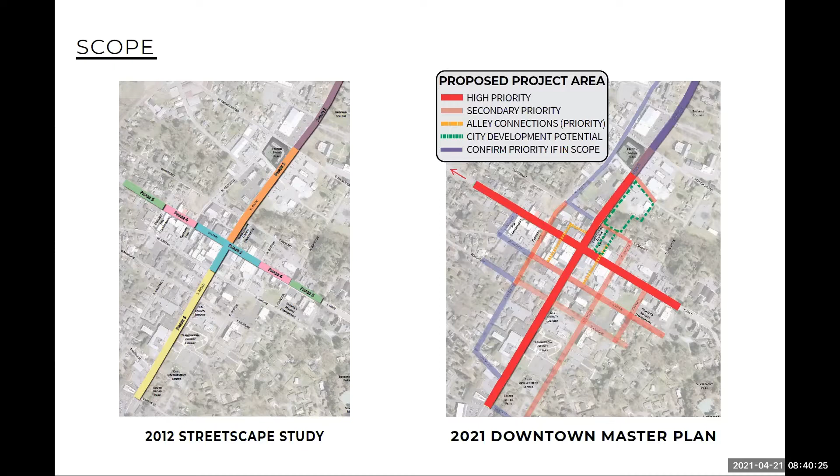To give you an overview of the schedule, we started this back at the beginning of this year with our existing conditions review and analysis of downtown. We had a conceptual master plan that we met with and reviewed with the Downtown Master Plan Committee back in March. We also reviewed a lot of that with NCDOT to make sure we were recommending things consistent with their guidelines, since we have a lot of restrictions on Broad Street and Main Street because of the state highways.

Now we just presented the preliminary master plan, which you're going to see here today, to the Downtown Master Plan Committee last week. We have 4 stakeholder meetings total planned this week, as well as one with the city and county in early May.

Next month, we're going to take the information we've gathered here today and through all of our stakeholder meetings and develop that into a final master plan in May and June.

I'm sure many of you probably think this is a very aggressive schedule, and it is. Part of the reason we're trying to do this in such a tight time frame is that we're trying to be prepared for another grant opportunity.

The city submitted for a BUILD grant in the past few years. That program has now changed under the new administration and is called RAISE. The notification for funding was just issued, I believe, last week and will be due in July.

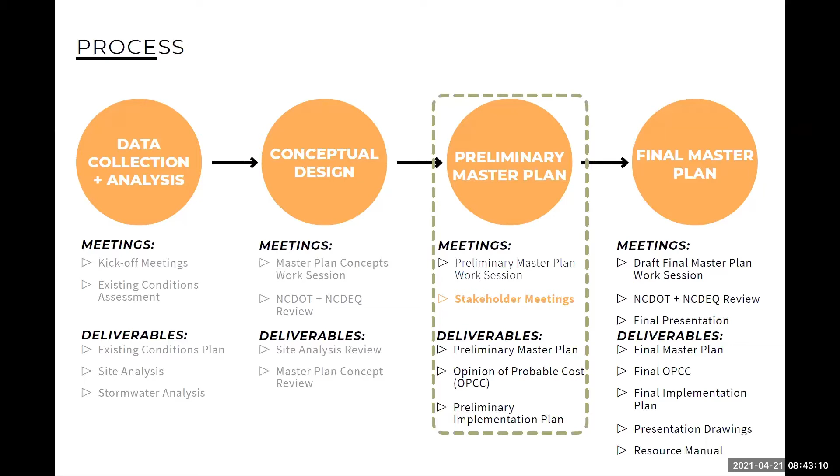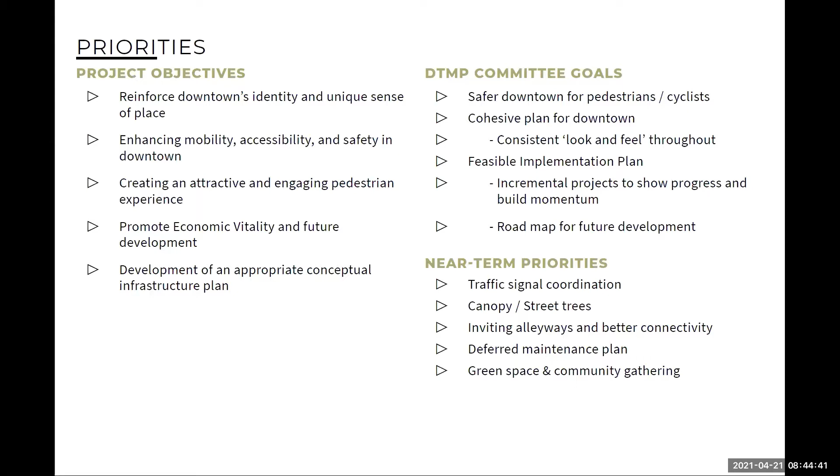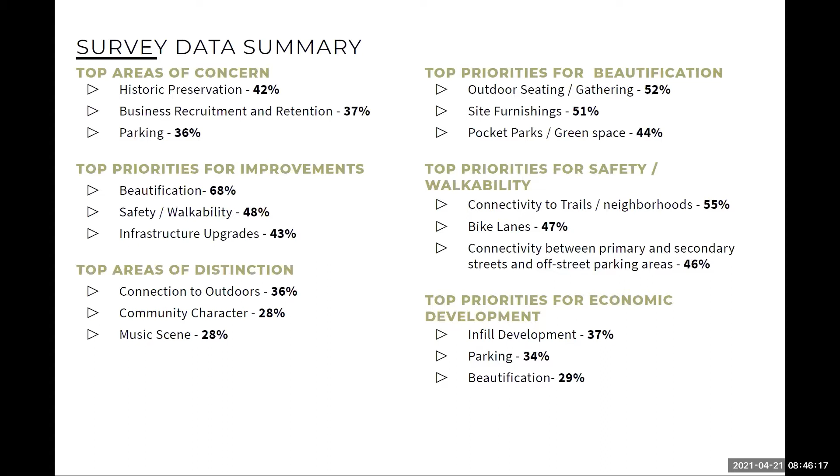Looking a little broader at the survey data, not specific to Heart of Brevard but overall by different stakeholders, we wanted to highlight the top areas of concern and priorities for improvement. A lot of the ideas people are interested in focus on connectivity to different neighborhoods and through downtown, as well as connectivity to our outdoor recreational resources - really improving bike lanes and mobility through downtown, overall beautification, and safety and walkability. We've tried to take all of this into account to focus our efforts in the master plan.

The master plan is going to be divided into these key components, and we'll go through each in more detail. But before we get into this, I wanted to pause for a minute to see if there were any questions so far about the process and scope of the project, and what we've been through so far.

All right, Geraldine. Hold on one second, I think we need to unmute. Sorry, can you unmute? Okay.

How many people responded? You may have said that, but out of the stakeholders, what was the total for the surveys? We had about 220 survey responses. Thank you.

All right, any other questions so far?

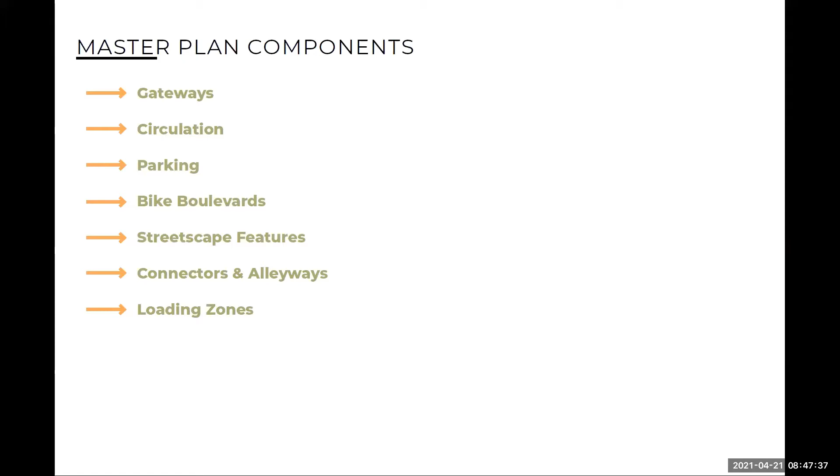All right, well, we'll move on to go through the master plan components now.

When we were looking at our master plan and focusing on the efforts of planning, we really wanted to think outside, looking at the gateway opportunities and how you approach Brevard and what the impact is to help guide your experience as you enter into the core of downtown.

One of the things everybody notices is the amount of traffic, the speed of traffic, noise - a lot of these things have a big impact on how people experience our downtown and really the safety as they're walking around. So we really wanted to look at different traffic calming strategies and make sure we were creating safe opportunities for crosswalks into the different neighborhoods that intersect and lead to downtown, but also trying to find ways we can potentially work with NCDOT and reduce some of the speed limits.

I don't know if you really pay much attention, but when you're coming into town, the speed limit doesn't really drop to 20 miles an hour until about a block from the core of downtown. With the way our highways are designed, it's really kind of a clear raceway almost. There's not really much to slow you down because we have such corridor development on the ends leading into downtown.

So we wanted to look at opportunities to help not only beautify, but use medians and boulevard design to help slow some of that traffic, possibly look at narrowing travel lanes. Right now we certainly have pretty wide lanes that promote speed and safety for vehicles, but not really thinking about the pedestrian in downtown.

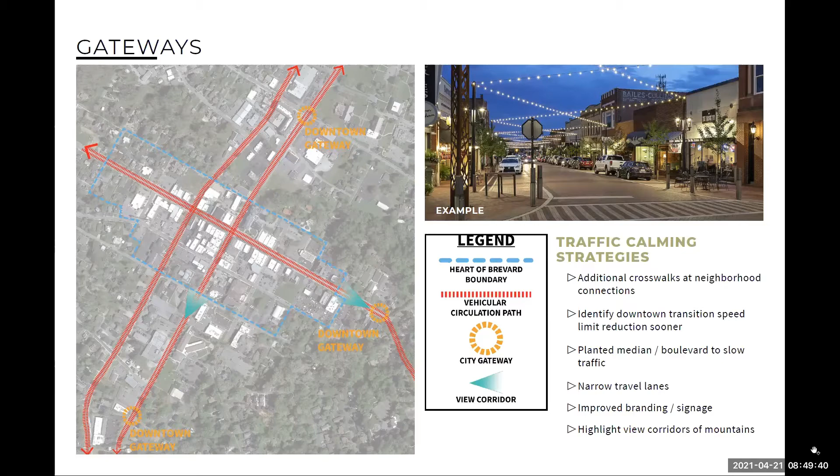We don't have a lot of ability to make changes to this, but we did want to think that if this is really your gateway into downtown - right now there's a small sign that says 'Welcome to Brevard' - maybe there are ways we can work with DOT to help provide landscaping and soften that and really create consistent signage with other areas.

As you're coming into town, the traffic pattern is really going to be impacted greatly by the implementation of these roundabouts leading into town. So this is really one area where maybe we should also focus on truck directional signage that helps guide through trucks that don't need to be driving down Broad Street, that really should be taking Caldwell Street. Hopefully we can give them better information to know which direction they should be going.

Because right now it's not very clear - a lot of those signs are kind of hidden behind trees or pretty small in nature. So we're hopeful we can work with them to help improve some of these to really start slowing traffic before it ever gets into the core of downtown.

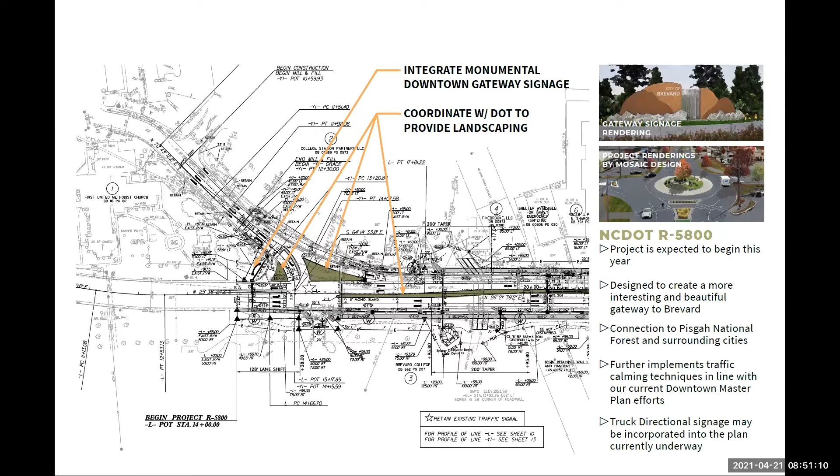But maybe there are ways we can introduce crosswalks that will also help start to slow traffic and make drivers understand that they're entering closer into downtown and help slow them down.

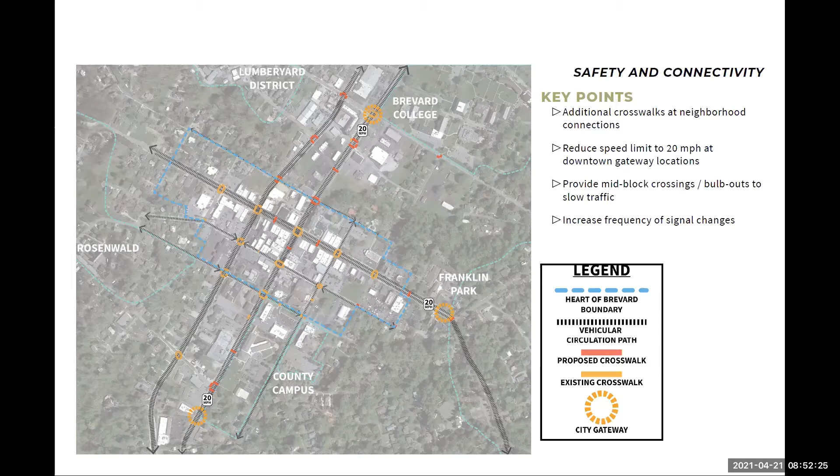And then also really focusing on the signal changes in frequency, trying to work with DOT. The city has already initiated conversations to help work with them to reevaluate that, because the timing just isn't really conducive for pedestrians in downtown circulation, but really just for moving traffic back and forth through town.

So we just highlighted a couple of these core intersections as you're coming into town. Certainly they need crosswalks and some modifications to the sidewalks, and a lot of them really do need some sidewalk improvements. As you can see, there are some areas, particularly on Broad Street around Appletree, that are already going to be impacted with the potential hotel development.

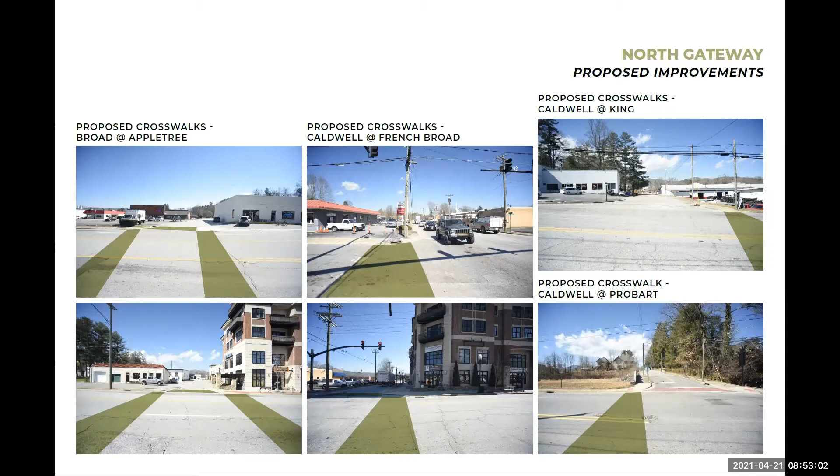So we're just trying to start to think about ways to make it safer for people to move from the neighborhoods into downtown, and try to help implement some of these traffic calming strategies.

And then as you progress into the North Gateway, looking at Broad Street leading up to the courthouse, the previous plan had developed a median concept. We've been looking at how we can maintain that to help slow traffic and signal that you're coming into downtown, but maybe keep it on the lower end of the hill so we're not obstructing views of the mountains.

We don't really know what's going to happen in this parcel, the exact design of the potential hotel if that comes into fruition. But there are opportunities to use the additional right-of-way for additional sidewalk and potential bike lanes, as a creative way to promote pedestrian connection from the bottom of the hill up to downtown.

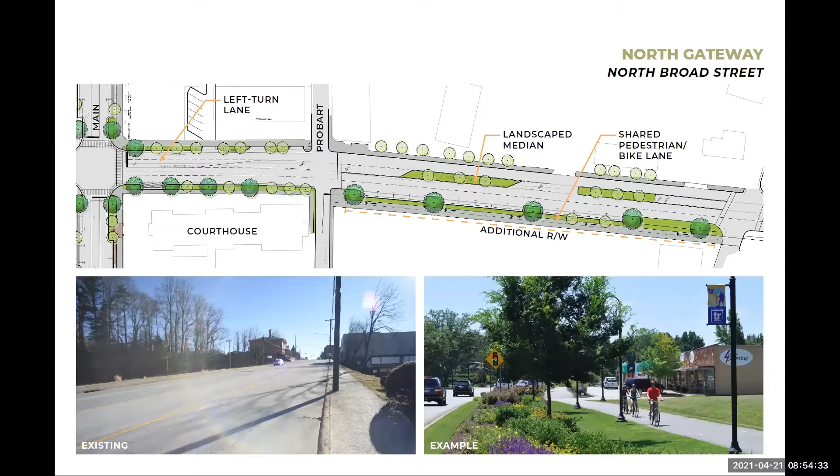We'd also like to look at creating a left turn lane onto Main Street to help with traffic backup and alleviate flow that's currently using Probart Street, or Appletree, as a bypass, so we can move traffic safely through downtown. That would require the loss of a few parking spaces along the McMinn building, but potentially we can allocate those elsewhere.

That's a long block, and without any crosswalk, trucks and other vehicles really gain a lot of momentum coming up the hill before they approach downtown. So that would not only make it safe for people to move back and forth from the neighborhoods and across the street, but also create a more inviting pedestrian experience.

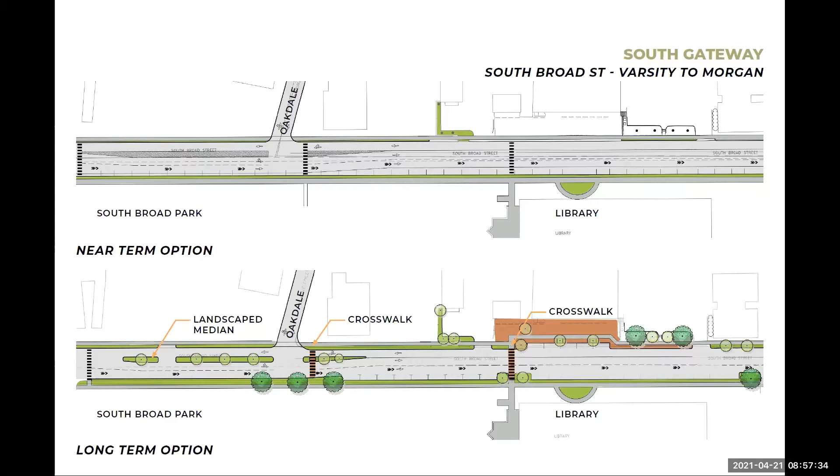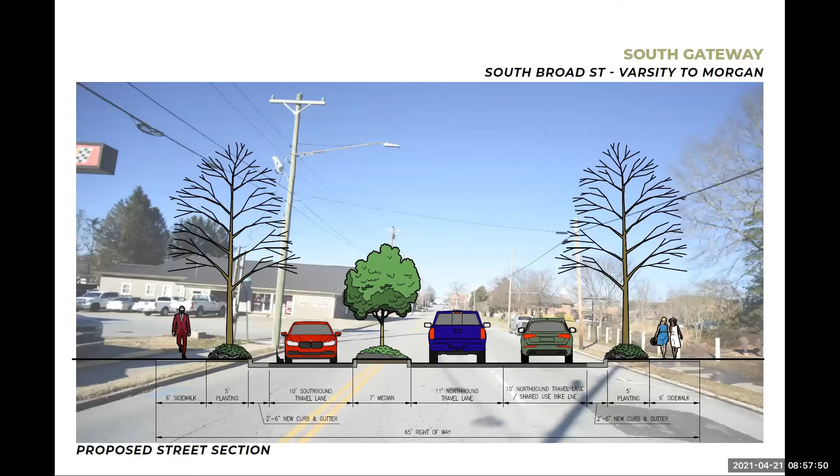This is just a quick overview of what that could look like, looking at the view and seeing the travel lanes and the pedestrian space, with some additional planting spaces on the side to help screen the vehicle lane from the sidewalk.

It would be nice to eventually look at relocating and burying the overhead power lines to help create a more consistent feel and appearance, which would also free up a lot more opportunity for landscaping. Maybe we can use a landscape median to help frame that, and then open up your view as you get closer into downtown.

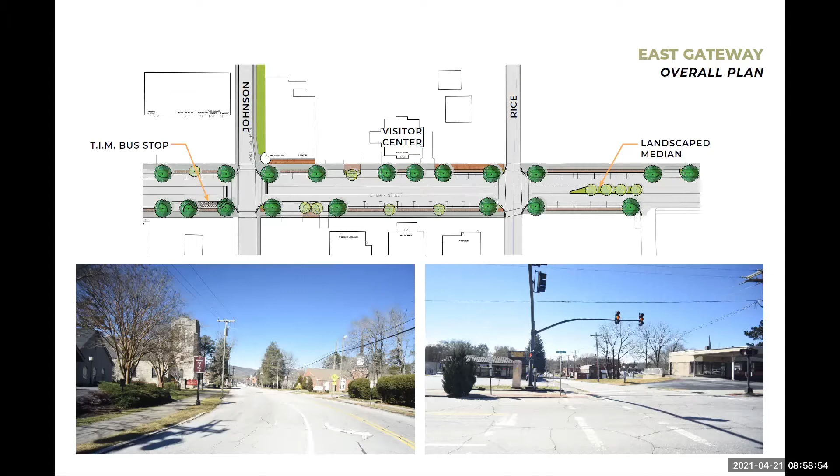Looking at downtown parking, we know that has been a key concern, and we're really focused on promoting signage and wayfinding to off-street parking areas to alleviate the pressure on Main Street.

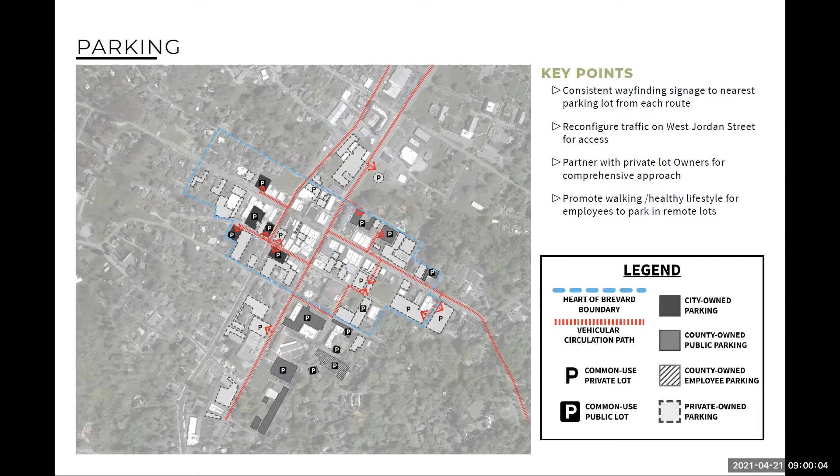Just highlighting the pedestrian circulation, we looked at what's appropriate in a downtown setting as far as how far people are willing to walk.

We understand Brevard has its challenges with topography, and it's certainly much easier to walk north to south because you're not having to cross Broad Street or Caldwell Street with the signals and timing involved. But there are a lot of challenges with the topography there.

If we can find creative ways to promote walking, a quarter of a mile is more than sufficient for a lot of people, like when you're living in other cities — and we have a lot of parking opportunities here too.

Also looking at the county campus, there are a lot of great resources and a pleasant experience already if you walk on some of those streets. It's really just promoting that connectivity to get from there to downtown, to the core, to help people understand the parking opportunities available.

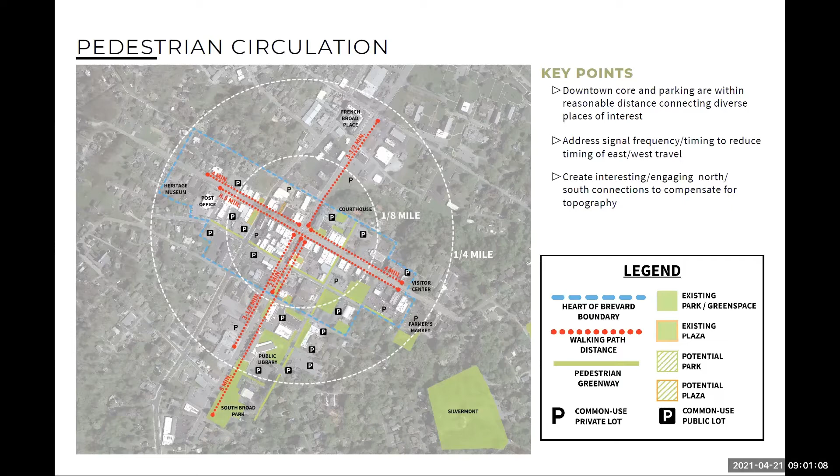We also really looked at bike boulevards. That was a key component of some of the survey results — thinking about how we can connect. There's a lot of connection with the Greenway and to outdoor recreation throughout the outside of the downtown core, the city, and the county.

We really wanted to make sure we were accommodating a safe way to help you cross through downtown. As mentioned before, on Broad Street and Main Street, while we want some shared travel lanes, those wouldn't be promoted for families or inexperienced riders who might not feel as safe.

But we do have a lot of opportunity using Morgan Street and Jordan Street, creating bike boulevards that follow the direction of traffic to safely access downtown and put you at core parking locations — long-term parking for commuters working downtown, or if you want to stay and shop or do activities all day. There are opportunities for both long-term and short-term parking, but we'll go through the details of how these bike boulevards could work.

We're looking at using Johnson Street as the key connector that could get you to the college and move you on to further locations for outdoor recreation. You also have connections to the Greenway and to the neighborhoods off of Johnson and Gaston Street after using Jordan and Morgan Street as your connectors into downtown.

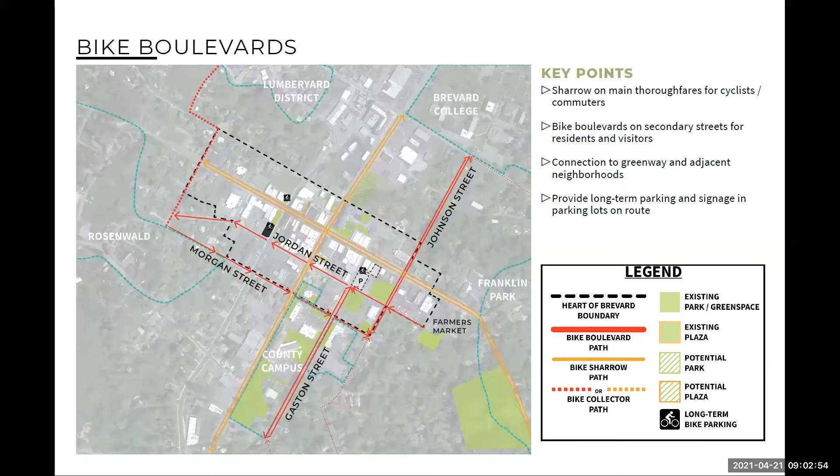As we mentioned, there's definitely opportunities to have some short-term bike parking on Main Street, in front of our businesses, but potentially we can look at using the alleyways to help provide opportunities to make it easier for bikes to come off of Jordan Street or even Probart Street, while also promoting signage and helping direct people to different parts of downtown, as well as other local areas of interest.

When you look at the bottom right, we're going to propose Jordan Street could have a lot of improvements to make it more pedestrian and bike friendly, really kind of keeping you out of the congestion of Main Street, but still providing good direct access to downtown.

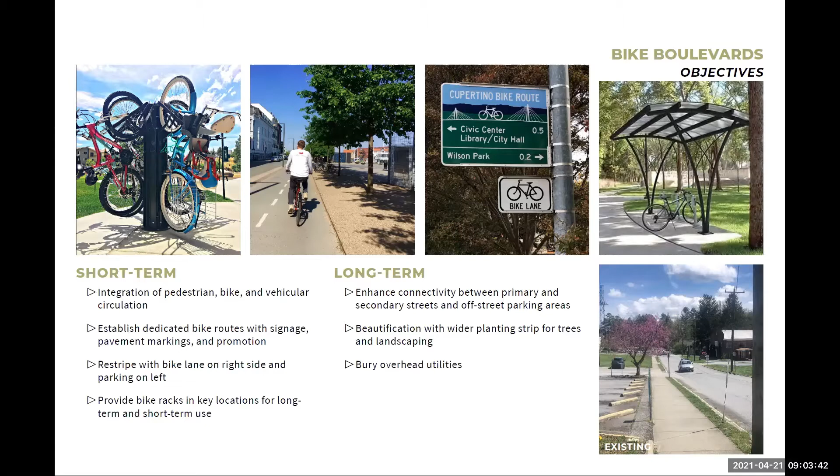Looking at the detail of West Morgan Street, this is really kind of looking at how we can create a bike lane on the right side of the road. Right now parking is on the right side, but we have the width, if this is a one-way street with a single lane, to locate a dedicated bike lane on one side and the parking on the other side.

In the near term, that could be accomplished with just some striping. Then in the longer term, we could look at other ways to help beautify and landscape some of the in-between spaces between those parking spaces, to help make it a more pleasant experience and have a more consistent appearance with other areas throughout downtown.

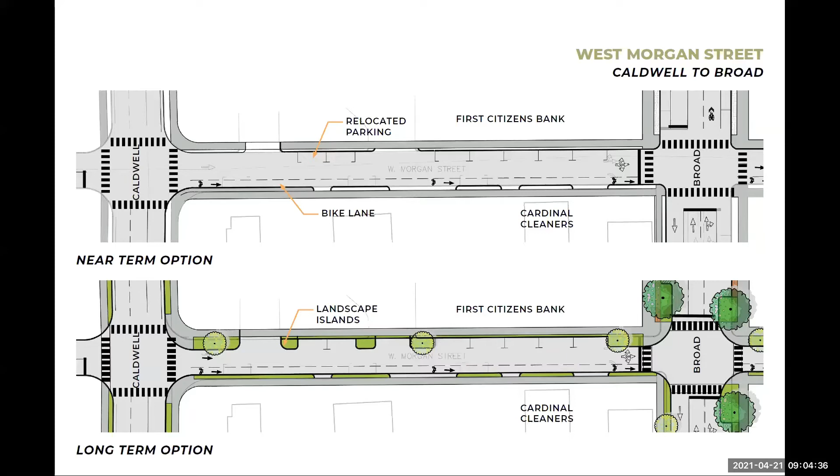When we look at East Jordan Street, going westbound the other direction, similarly on the top you see the light gray ghosted in as the existing condition, where the parking is really on the right side of the street. But here we can also look at locating the parking on the left side of the street, and maybe even have some potential shared loading and parking spaces.

But because of this location, particularly at the intersection of Broad Street, right now you don't really have a lot of visibility there, and it's pretty dangerous to make a right turn lane or a right turn there with the signals without being able to see traffic.

So there's not a whole lot of traffic here, so there's an opportunity to make this just a single lane that stops at the light with really no turn on red, especially if we're able to get the signals to change more frequently, to help make that a little safer.

Longer term, this is showing a little bit more drastic change, if we could even look at finding other parking options, you could really enhance this as a stronger pedestrian and bike street by narrowing the street width, maintaining the bike lane and a single lane of traffic, but widening the planting strip to create more green space and trees that could follow the whole length of Jordan Street.

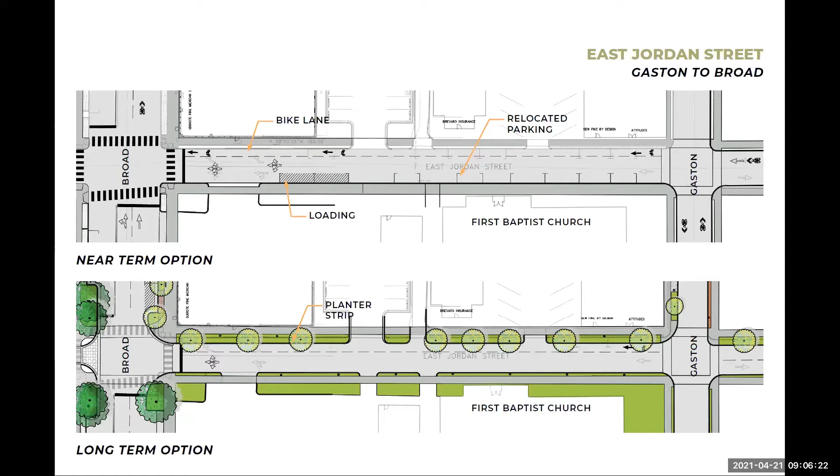With the bike boulevards, as you'll see here on West Jordan Street, you don't always have the bike lane. When you have single direction traffic, you have a bike lane, but when you have two ways, it really becomes a shared lane. So just having enough signage to help indicate that will help maintain the safety.

We're looking, and you kind of get a sneak peek here at some of the initial thoughts about how we could improve Jordan Street.

So we've looked at ways to help provide access to the parking lots that are on either side of Jordan Street, this being the city parking lot, and also the private parking lot behind the old bank building.

If we could change the traffic pattern and have two-way traffic just on that part of the block, we could have more direct access to those parking spots for people coming from Caldwell Street. That could also help minimize the amount of traffic that needs to come down from Broad Street onto Jordan Street, creating opportunity for a more pedestrian-focused event street.

It could certainly still be open to traffic, but have opportunity for more green space and seating. One idea is that since Broad Street is loud and busy due to traffic, providing more seating on Jordan Street could help bring pedestrian traffic into that area and create a livelier zone. We'd maintain access on Times Arcade, but hopefully minimize some of the traffic in that location.

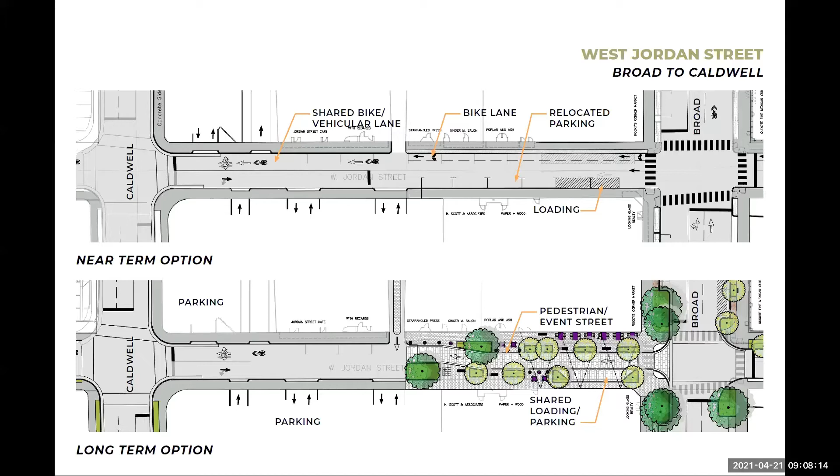This is a proposed sketch of what that could look like with the shared street concept. There are a lot of ways to do a shared street. We could make it so there's more access for some vehicles, and look at how we can have smaller vehicle loading access to help with the businesses.

But there are ways to promote the pedestrian experience and make vehicles feel less comfortable, so it feels more like a pedestrian space that helps slow them down and be more cautious, making it more pedestrian and bike friendly. Long-term, relocating and burying the power lines would really change the overall appearance of that street.

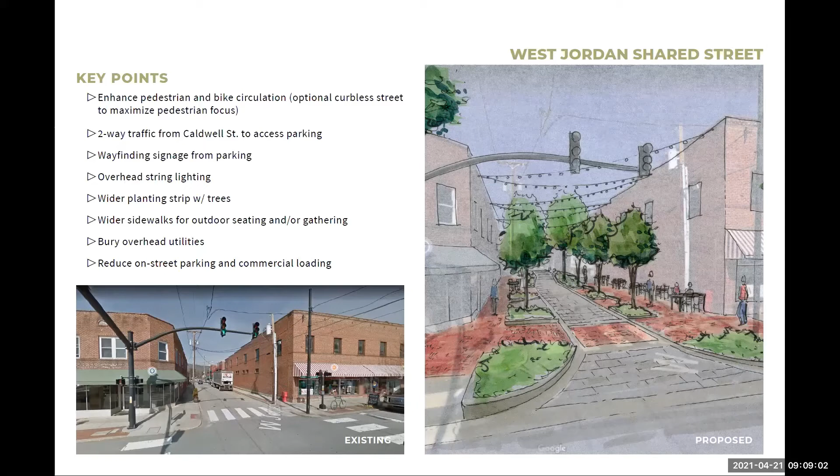So we'll take a quick pause here to see if there are any questions so far before we go further into the rest of the presentation.

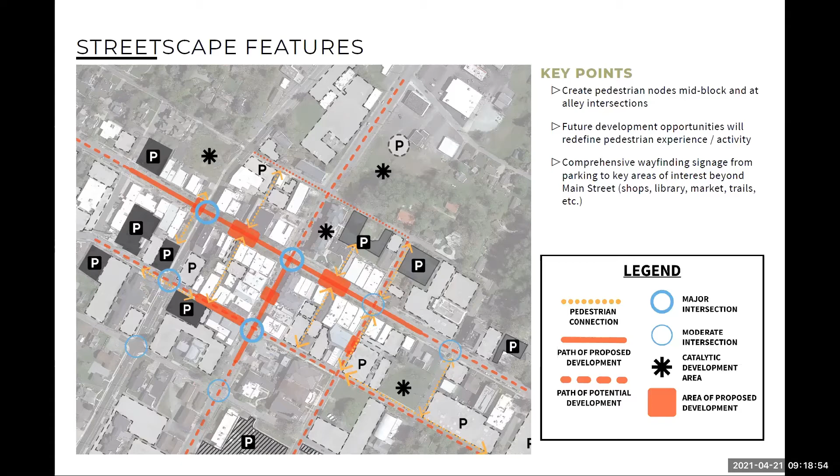This is an overall plan showing the scope of what we're looking at for beautification and enhancement downtown. We certainly don't have time to go through all of this in one meeting, so we're going to focus on a couple of key blocks and talk about the key elements that get repeated throughout downtown.

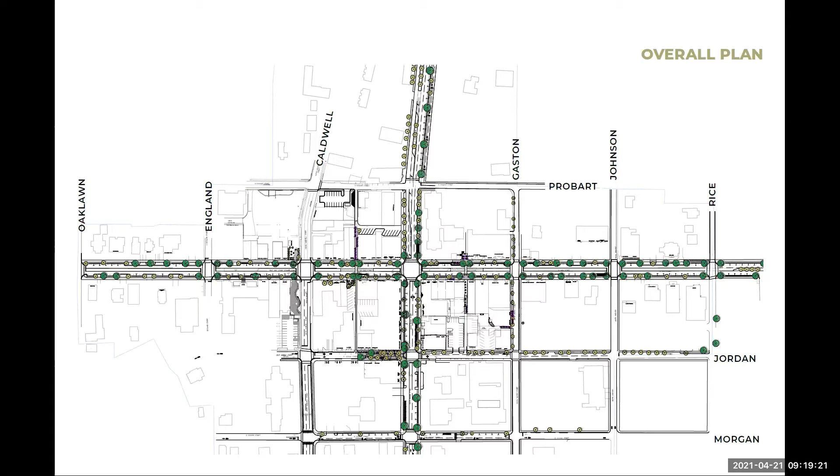One of the first key components is really looking at curb extensions, as you've seen a bit in some diagrams already, particularly at the intersections. Those provide opportunities to shorten the distance pedestrians have to cross the street and improve visibility, because cars aren't parked right up to the intersections like we have now.

It also provides opportunities for additional public space and seating, and more landscaping and planters, so we can have larger and healthier trees instead of trees in these little 4x4 planting grates. We're really trying to minimize the use of grates that don't promote healthy trees.

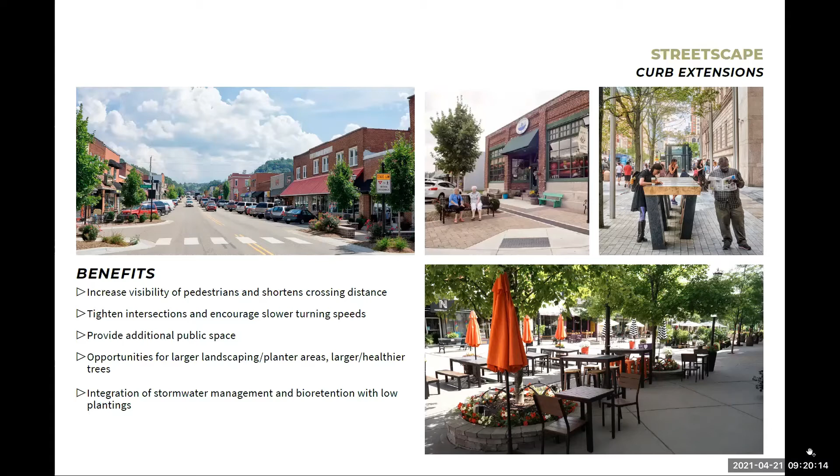It changes drastically as you move from two blocks off of Broad Street, but even on one block on either side, you have a lot of variety in the types of uses and how people might want to use the space.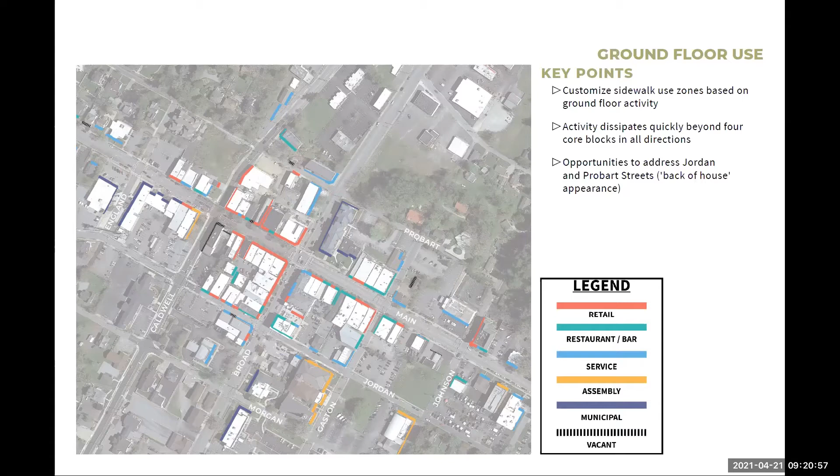You do end up losing some parking spaces, but we're able to create much larger, more inviting spaces for benches, tables, and different types of seating, which helps free up the rest of the sidewalk. We're very limited because of DOT restrictions, so it's not easy to just widen the sidewalks, and right now you have a repetitive pattern of tree, bench, light pole, and other furnishings that people are putting out.

If there are ways we can concentrate some of these larger gathering areas under larger shade and trees that are centralized on the block, that helps free up space along the length of the block for more pedestrian movement and wider sidewalks.

The sidewalk isn't really changing much because of our limitations, where we have the primary pedestrian zone, which is the concrete, and then a paver zone for furnishings, light poles, and those kinds of things. But we're looking at focusing those seating areas on the alleys and really enhancing the alleys to help draw people in.

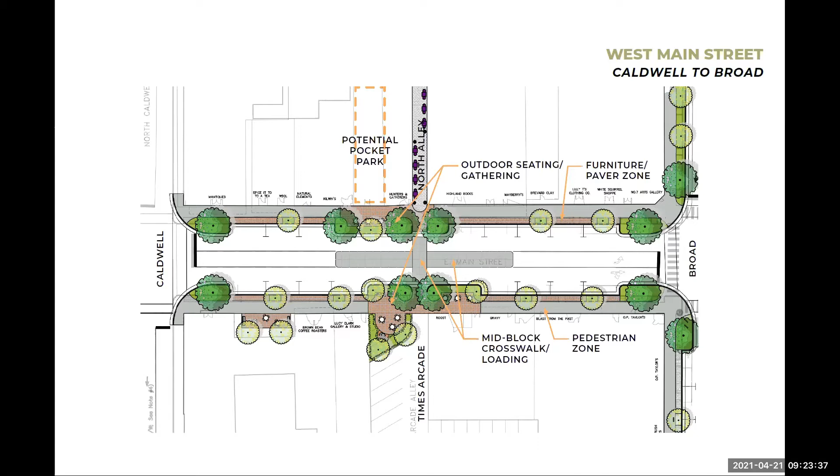These bump outs start to create those little pocket parks and gathering areas, but there could be other opportunities to create larger spaces as well.

But we looked at creating a larger seating area in the center there as well, which also creates opportunity for more seating around the gazebo if that continues to be used for outdoor events. That could be a nice amenity as well.

And we're still showing larger trees on the corners and in these bump outs where we have more planting area. We're also showing smaller trees in the middle of the block. Those are in larger planting areas than we have now, more like a 4x8 kind of space that would help promote healthier trees and have more landscaping around them.

And there could be an opportunity, we're working hopefully with the county to look at some of these ideas and think about ways to expand and maybe modify the wall over by the gazebo to create a larger seating space.

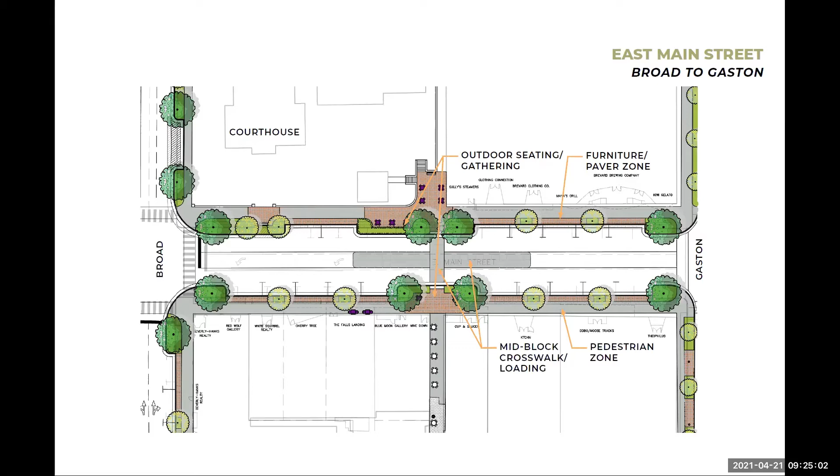But we looked at ways that we could also incorporate those mid-block bump outs to create an area of refuge for some additional seating. As we mentioned, there's also opportunities to really draw people around the corner to a quieter, more protected, pedestrian-friendly area that would have more opportunities for public seating.

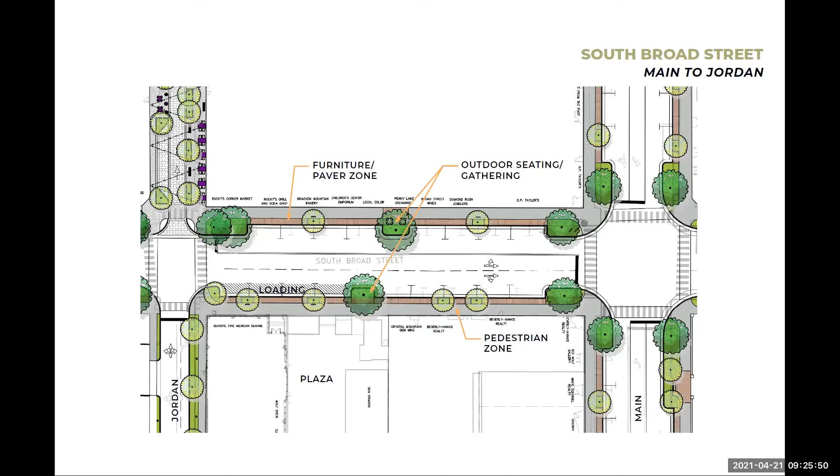And provide seating. We've already talked with Platt about the opportunity to look at taking over some of their parking, so that when people are backing up, they're not going to be backing up into those sidewalks, or people may not be paying as close attention. We certainly could look at adding some lighting or different ways to make that feel more inviting.

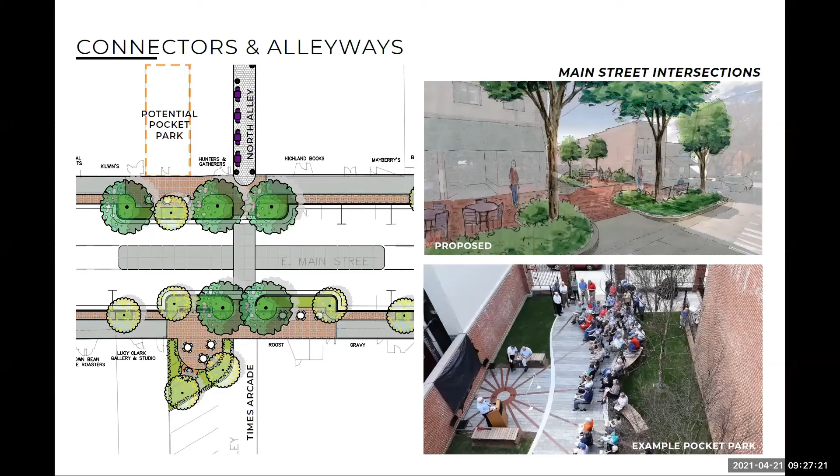Similarly, on the other side of the park, there's opportunities with the way that bump out is situated. If that ever was to become a pocket park, you could have a combination of plaza and green space and start to use those as smaller event areas, utilizing the bump out seating that also helps make those alleys and potential pocket parks feel larger because they expand into a larger area.

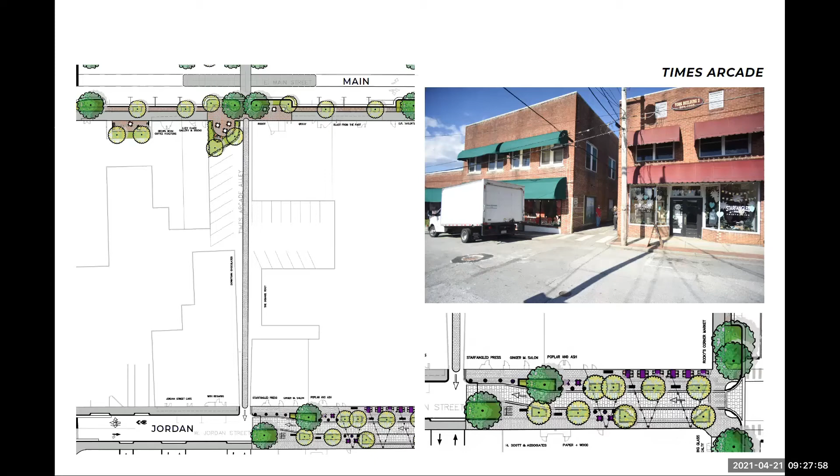If you really spent some effort improving these alleyways and making those connections more inviting and friendly, and managing the traffic and pedestrian flow.

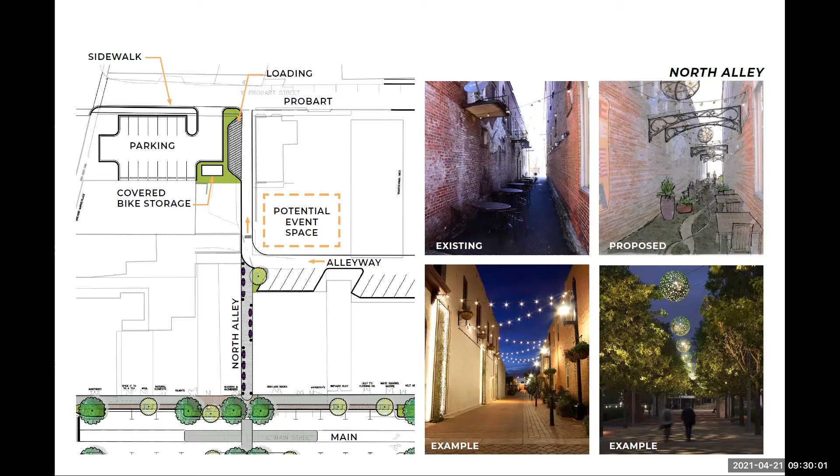And then also working with adjacent property owners in all of these situations on how we can help beautify and clean up those areas and work together, so we could potentially extend the space.

It's hard to really extend the pathway at the same level, so it really needs to be at the grade there, but maybe there's opportunities with lighting and different planters and seating that could help that feel more a part of the alley at the front, closer to Main Street.

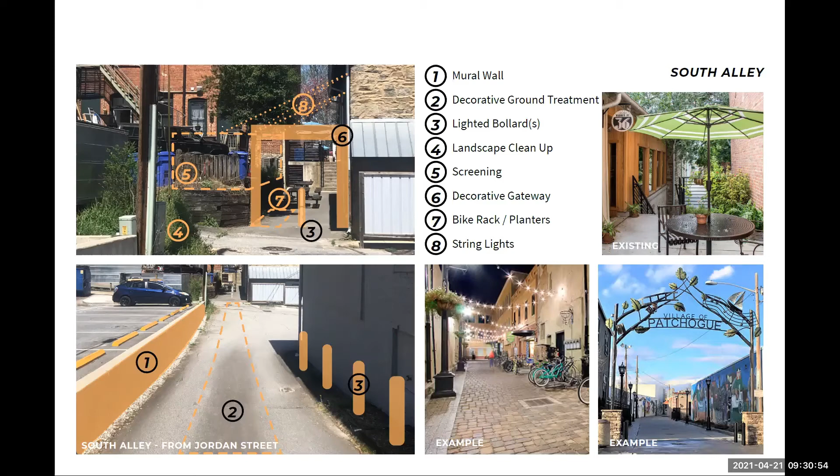And then Gaston Street is another key connector street that we were looking at, with the parking that's the First Baptist parking, really some spaces are dedicated to them, but as well as some other adjacent properties, it's kind of shared use that allows the public to use.

Maybe there's ways to look at extending, similar to Jordan Street, beautifying Gaston Street and narrowing the travel lanes to provide more seating, so that we could create a more inviting space so that when you turn the corner from Main Street, there's tables or landscaping or lighting that helps connect this part of downtown to the rest of downtown and helps draw you down this way, creating that connection that helps draw people with signage down to the library, making that connection all the way down.

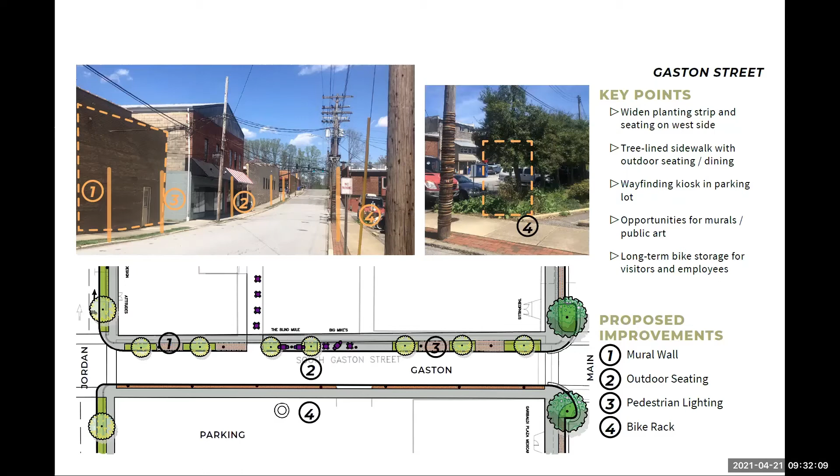There's also opportunities for long-term bike storage, maybe looking at some of these leftover spaces, so you don't have to lose parking, but you could promote access for bikes for longer term, for employees or others coming down to spend the day downtown.

So before we jump into loading zones, I know we're going to hold for a lot of questions, but if there's any sort of quick questions on what we've talked about so far, we can talk about those now.

All right, so loading zones, we just wanted to go over this. We took a hard look at it and also sent out the survey and wanted to share with everyone some of the information we gathered. We know we're not going to solve this problem, but we wanted to think creatively about some strategies for how we could help manage this in the future, and these are some of the results of the surveys.

We had about 20 something responses on this survey, from a wide variety of different business types. So it's clear that we have a variety of different service delivery vehicles of different sizes. We've tried to look at where the most popular and most problematic areas for delivery vehicle location are, and certainly Main Street, the center lane, is one of the most popular.

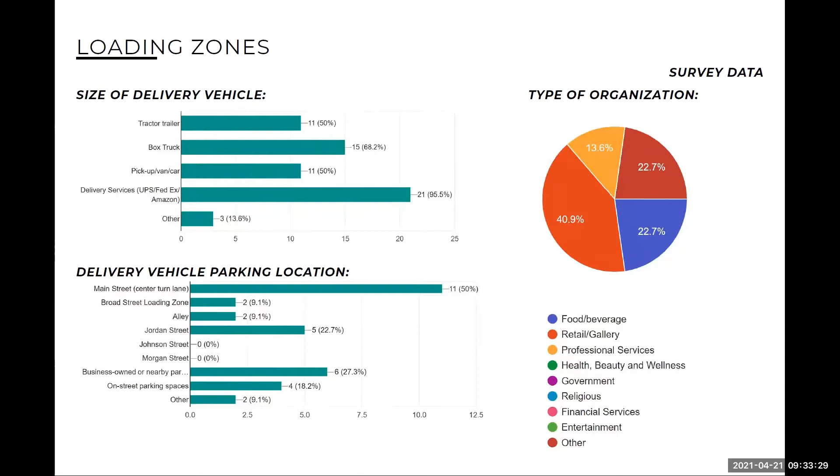If we flip over to the next slide, we also try to look at the timing of deliveries and how long these are taking place. As we look at some of these key ideas of how we know they're happening, it's kind of all day long, right at the core of the day, at the busiest, most congested times downtown. Generally they're not taking up too much time.

However, what we don't really see in the results of this are some of these delivery carriers that are parking on each block and making multiple deliveries to multiple businesses, kind of working their way through downtown, which causes some additional congestion.

Some of the other comments we received in the initial survey that weren't specific to loading really talked about some of the hazards with conditions of a lot of the loading vehicles blocking the center lane of Main Street. We know, just like everywhere else in the world, service vehicles and deliveries are becoming more of a problem.

And as downtown continues to grow, this demand is going to increase. We do want to make sure that we're creating a safe environment. Every now and then you do see some unsafe blocking of pedestrian and vehicular situations, but whatever we can do to help alleviate that, we want to look at opportunities.

And then just kind of the unspoken of, when trucks are trying to find spaces, they certainly are idling or circling the block trying to find places they can park. That really just contributes to the congestion, noise, and general pollution that we have downtown.

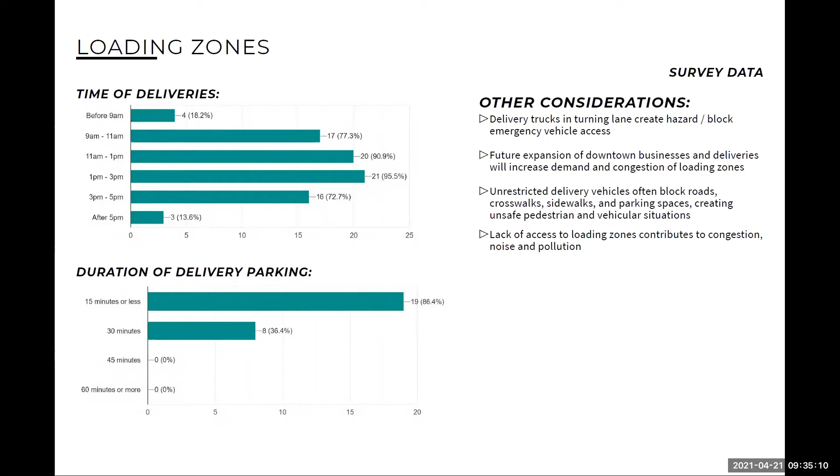We've done some research and looked at what other people are doing, trying to find some new innovative ways to deal with this. Some of the ideas we've come up with, we certainly aren't forcing anything—these are all opportunities that really need to be vetted, and there's no way to know if they're going to work until we test them in downtown and really get real data to understand where the problems are and how we can address them.

We're seeing other communities that are trying to come up with shared flex zones, where you don't have as many dedicated loading zones because certain hours of the day those aren't really used, and that takes up valuable curb space that could be used for parking.

So there could be opportunities to have some spaces that are shared, to where those could actually be used by the businesses to help with their deliveries, pickups, and drop-offs.

You can also use that to help with some of our older and less mobile visitors to downtown, making it easier to drop off and load and unload for accessibility parking, not having to only rely on ADA parking spaces. It also allows for opportunities to have maybe 30-minute commercial loading, but you could have 5 or 10-minute active loading by others, so those spaces would be available for larger vehicles.

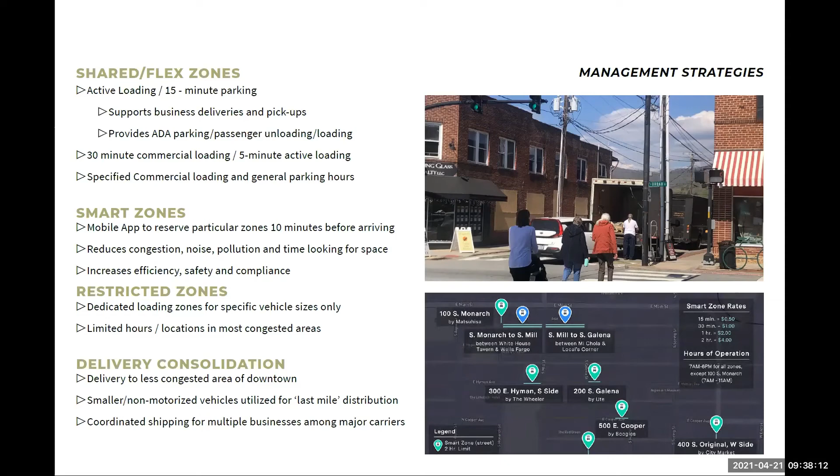One thing we wanted to suggest is, because of the types of zones, could we dedicate some areas on Main Street primarily for larger vehicles that can't make turns onto smaller streets, and then have areas on secondary streets for shared loading for smaller trucks that can make those turns.

Another thing shown in blue is the short-term carry-out spaces the city has implemented in the past. There could be opportunity on each block to put two of those spaces together, so they could work as both short-term takeout parking and shared spaces for smaller delivery vehicles for businesses, making it easier to access.

On Broad Street, rather than having vehicles turn down a lot of the smaller streets, if they have a larger zone going each direction, they could access that much easier than trying to drive through some of the secondary streets.

Like I said, these are just preliminary ideas of how we could start to manage or come up with innovative strategies to promote certain areas for certain types of vehicles, to help alleviate some of the congestion.

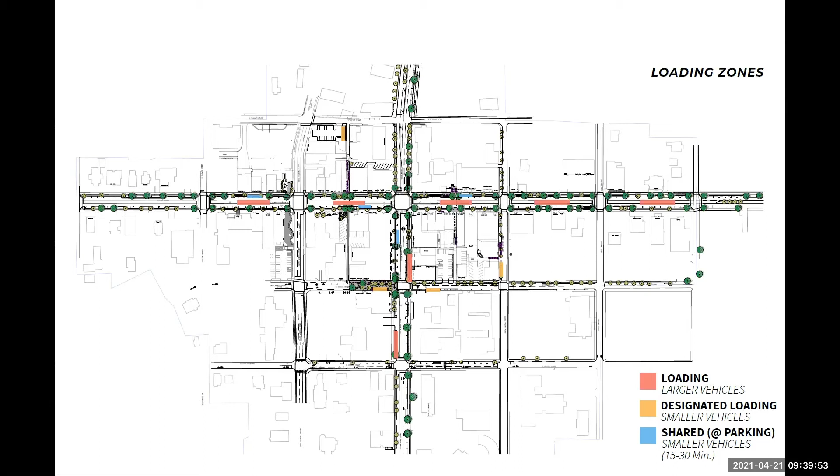So that's pretty much an overview of everything we've been working on for the preliminary master plan. We certainly want to open it up to comments and questions.